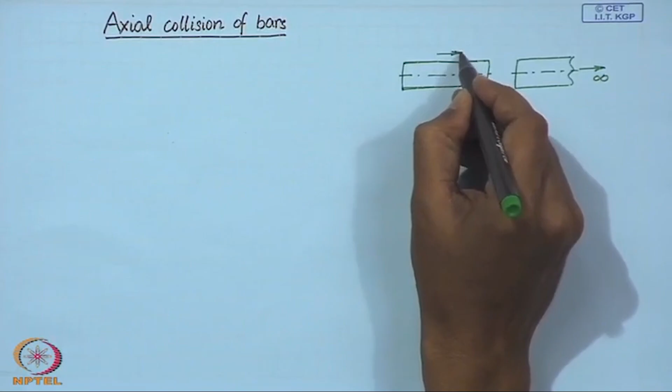Let me draw this figure. So this is a bar, this is a finite bar which is going to go and hit a semi infinite bar. In order to simplify the whole problem, we come to this very basic problem in which two bars are colliding. This one is moving with an initial speed, let us say v, towards this stationary semi infinite bar.

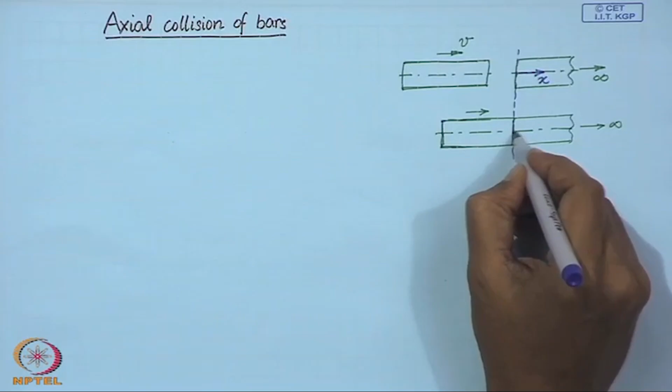What happens after this, that we are going to look at. We are going to fix our coordinate system at this initial location. So we consider this uniform finite bar moving with the velocity v and hitting this stationary semi infinite bar, and we assume that all the motion is in the axial direction.

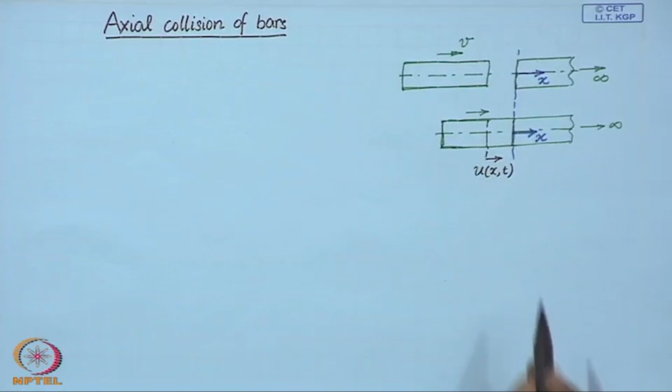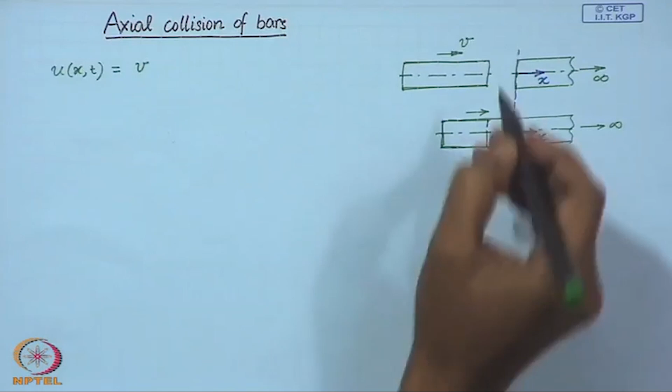So at any location x, the field variable for this finite bar is represented. The axial motion is represented by this field variable u(x,t). Now, the motion of the bar, this finite bar, just before collision — if I call this initial speed as v0.

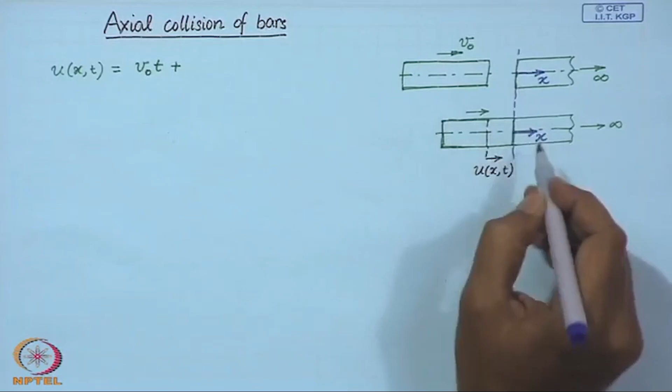Now as soon as this collides, what happens is this face of the finite bar feels this semi infinite bar or obstacle, and this information starts propagating in this bar. So there is a propagating wave in the negative x direction, which carries the information that this face has hit an obstacle. This wave which carries the information we will represent by g(x + ct). So this is the gross motion of the bar, and over and above this there is this wave which is propagating in the negative x direction as a result of the collision.

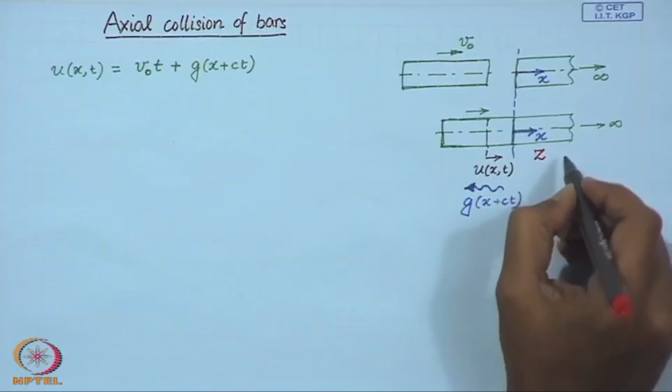Now this wave goes, and let us consider how this wave is being generated. We will consider that this semi infinite bar has an impedance z. This z we will consider for special cases, special values of z, later on.

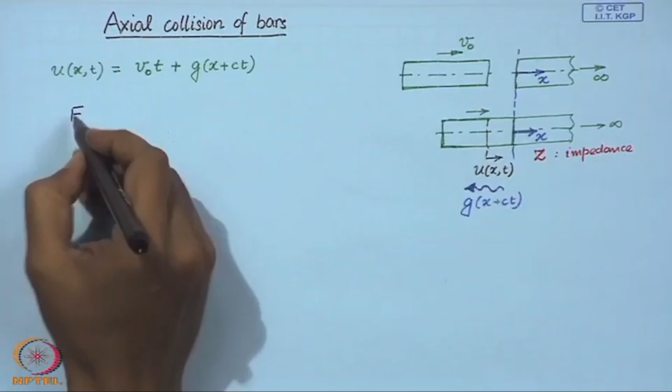So the boundary condition that sets this wave into motion is given by the force condition at this end. If the impedance is z, then z times the velocity of this face of the bar must be the force, and that force is being felt by this finite bar as negative of z times the velocity. So if you substitute this expression of u here, this is what we are going to get, and from here we can solve.

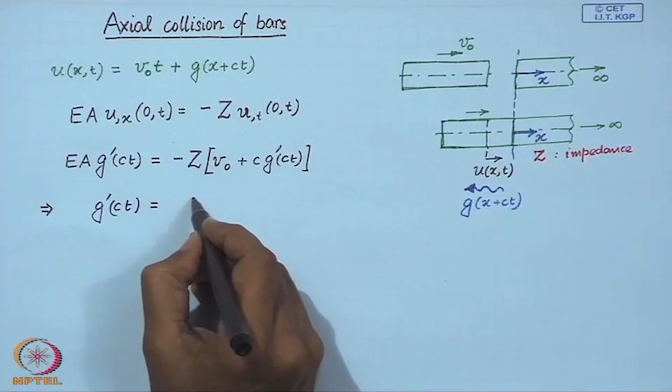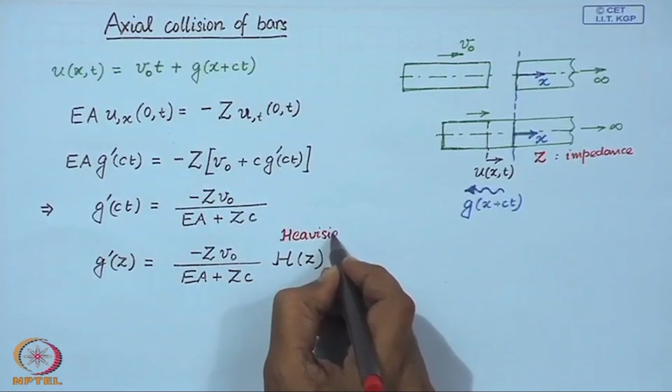So g'(ct) is given by this expression. Now, to take care of the causality, we can write g'(z) where this is the Heaviside step function. This is to take care of the causality of this process. So therefore this is the derivative of the wave that propagates in the negative x direction.

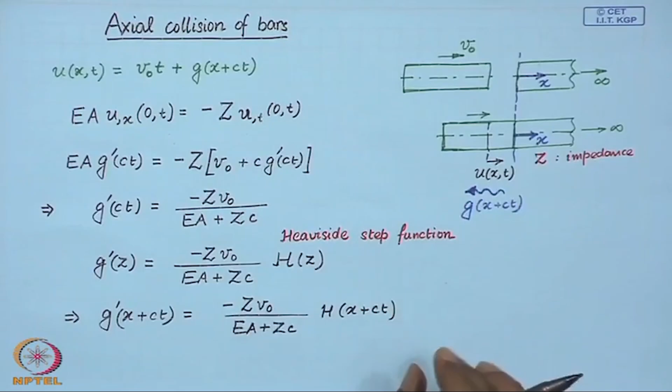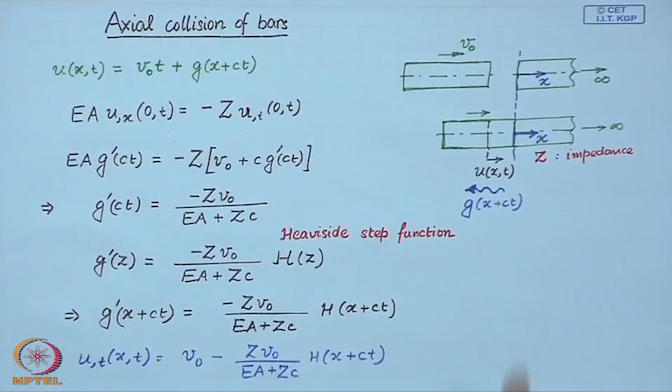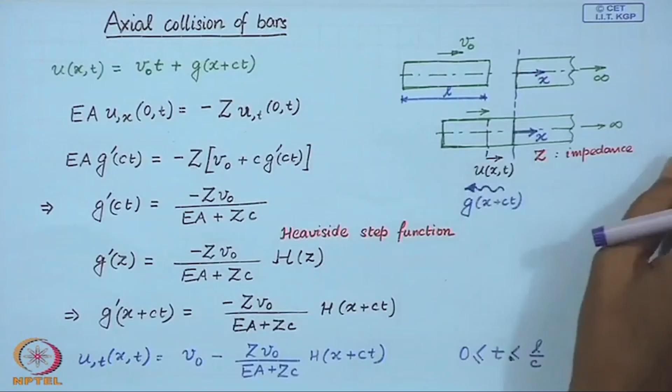So one can write down the velocity of the bar at any point — that is the velocity wave that propagates in the bar in the negative x direction. Now this solution is valid till the time L over C, where L is the length of this bar. So L over C is the time taken by this negative travelling wave to reach this free end of the finite bar.

So let us see what happens at the free end. At the free end, of course, there is a force free condition. So this is our finite bar.

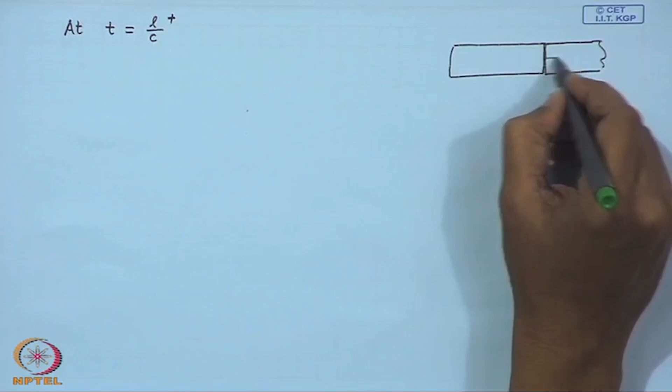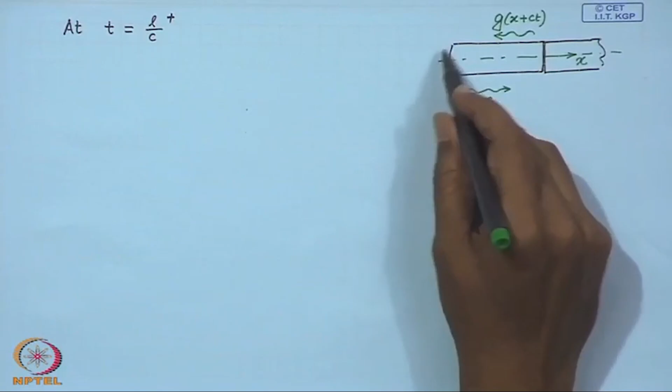There was a wave propagating in the negative x direction, and once this wave reaches the free end of the bar, it is going to reflect back in the bar. So, let us represent this reflected wave from the free end as f of x minus c t.

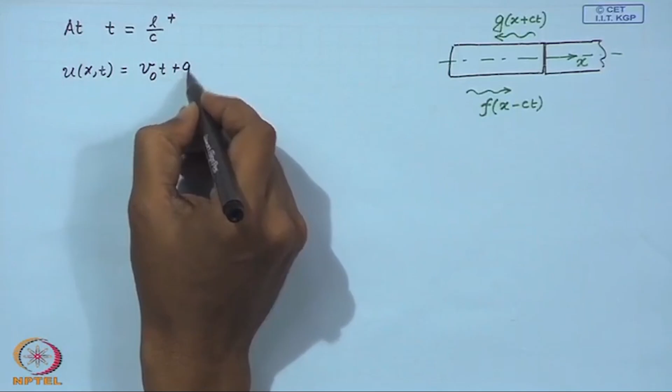So, therefore, we can now represent the wave field in the finite bar by this expression. Now, at the left end of the bar, the boundary condition applies.

Now, you see the coordinate system has been put here. So, this is a force free condition at x equal to minus of L. So, this is our condition, and once we substitute this expression in here,

and simplify, we are going to obtain this expression in terms of g prime and f prime. Now, g prime is already known to us, and if you substitute that expression of g prime that we just now derived, we can write this f prime z.

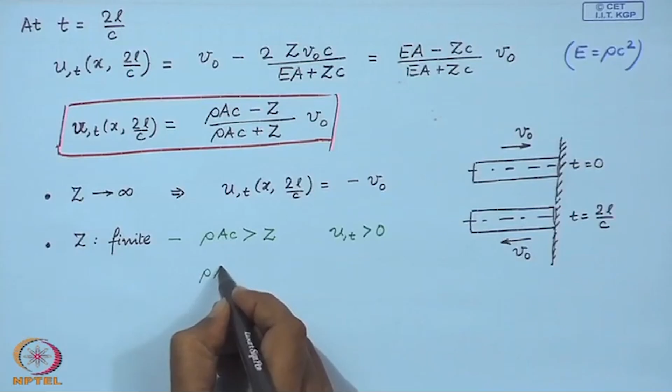Which means after collision the bar is still going to move to the right. In the case where the impedance of the wall and the bar match.

In that case, this bar, the finite bar, comes to a complete halt, complete rest. And the other case.

When the impedance of this bar is less than the impedance of the wall, then this ratio is negative, which tells us that there will be a bounce back of this finite bar.

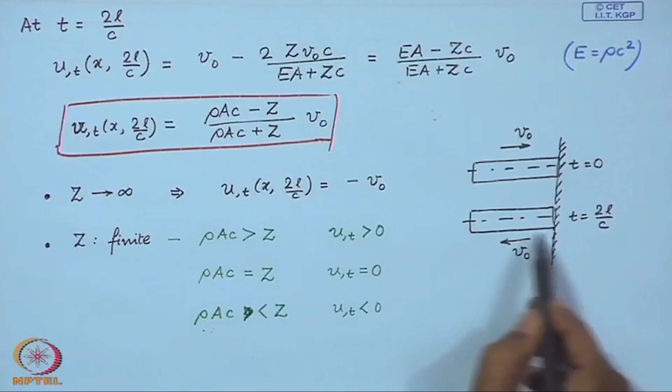So now, most of the time, if the conditions are suitable, if the damping etc. are minimal, then we will observe this phenomena where the wall is much more rigid than the bar itself or the object that is incident. So in that case it is going to rebound back.

In other cases where the impedance is less than the impedance of the wall, which is more likely to happen actually, then it is going to bounce back, but not at the incident velocity, it is going to lose that velocity. So where is it going to lose the energy?

It is going to lose the energy in this wall or the semi-infinite bar as we have considered. So because this impedance is now finite, some part of the energy of this finite bar which is incident here is going to go into this wall or the obstacle. So some part of the energy is going to be radiated into this obstacle.

In this case where there is complete impedance matching, this bar is going to come to a complete rest, and in this case it is going to go into the obstacle. So even after a collision it is going to enter the obstacle, because the impedance is much less compared to the impedance of this bar.

So these are some of the interesting observations that we can have. We also observe that collision, even though it seems instantaneous, it is not, as we can understand that this takes place after a time interval of 2L over c, where c is the speed of axial waves in this finite bar.

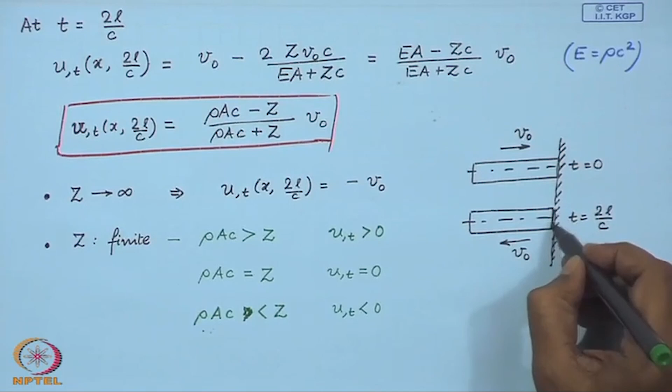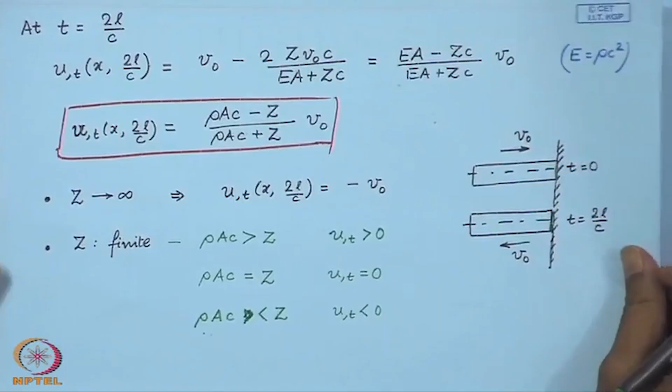Now, so this example can be used to understand the phenomenon of collision of objects. So here again, using the wave solution, we have looked at this transient phenomenon.

Now let us next look at what happens in a traveling string. So vibrations in a traveling string or a translating string.

We have discussed this traveling string problem before, and the traveling string occurs in a loom or in a rolling mill, etc. So we can approximately model a thread line, a traveling thread line, as a traveling string.

Now we are going to look at the wave propagation in a traveling string, how the solution can be represented using these traveling wave solutions, and finally look at scattering of waves in a traveling string.

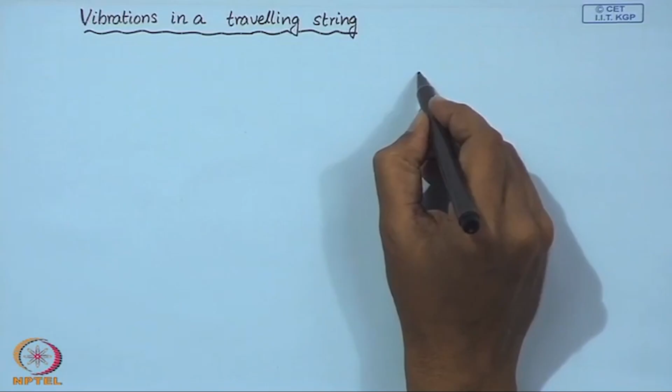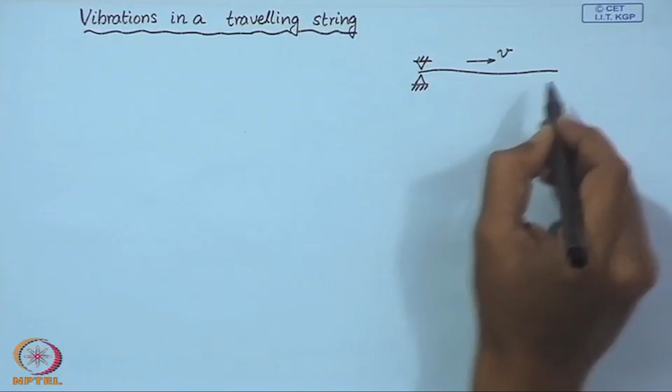So let us consider this string which is traveling at a speed v. So we have derived the equation of motion.

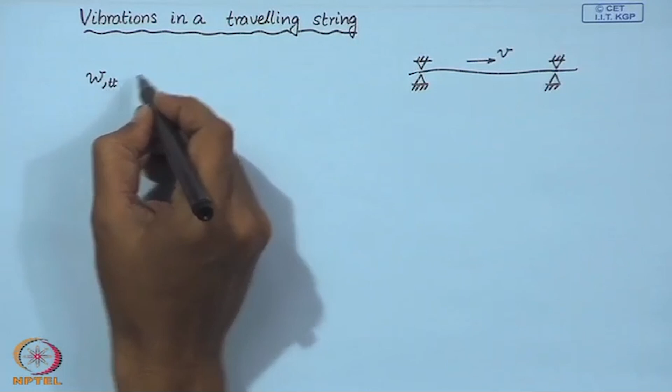For a traveling string. Now here I have shown boundaries, but since we are going to consider an infinite traveling string, we are going to look at wave propagation in traveling strings and understand the solution in terms of these propagating waves.

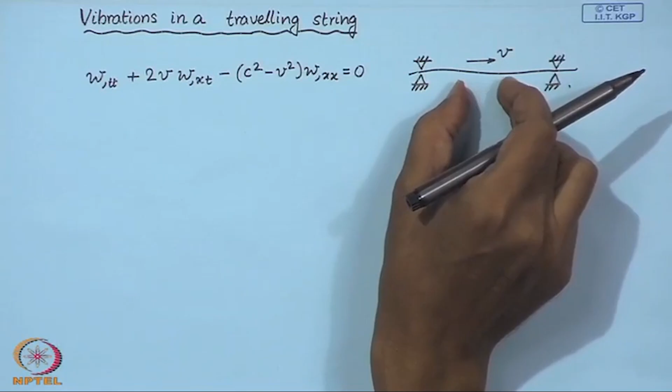So which means that even if I have a disturbance in a finite traveling string, we are going to look at transient solutions. That means, when this disturbance has not reached the boundary. So initially we are going to look at solutions which do not interact with any boundary.

Later on we will see what happens when there is a boundary and there is an interaction. So to begin with, we do not have boundary conditions. So if you consider an infinite traveling string, then we do not have boundary conditions.

Now let us look at this little transformation. Let me define xi, a new coordinate xi, as equal to t, and another coordinate eta as x minus beta times t, where beta is a constant.

Now, let us recast this equation in these coordinates xi, eta. So, here the field variable was w(x, t), our new field variable is w tilde(xi, eta), and we need to determine the equation governing this new field variable.

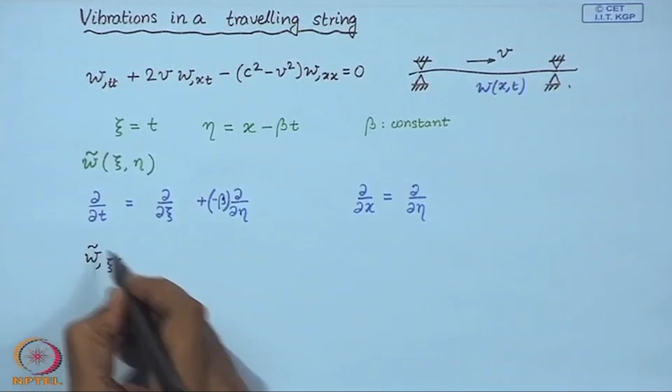Now, when we replace these derivatives here and make simplifications, this is what we obtain. Now, if we make a choice, if beta is taken as v, then the equation reduces to the wave equation, but now in these coordinates xi, eta.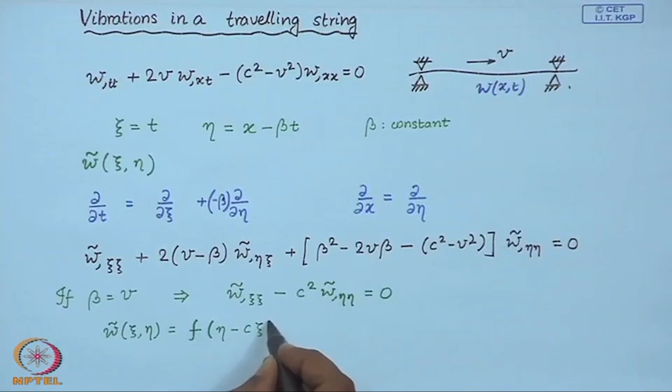Now, we already know that the solution of the wave equation can be written as... and if you go back to the original coordinates, this implies that in the original coordinates, this is the wave propagation solution, or the D'Alembert solution, for the travelling string.

So, now you can see that there is a positive travelling wave whose speed is c plus v. So there is a positive travelling wave with speed c plus v, and there is a negative travelling wave with speed c minus v in the string.

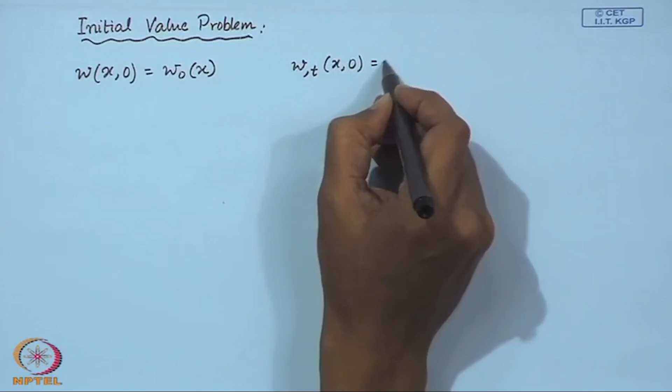Now, let us look at the initial value problem. We have looked at this before, for the static string. Now we can once again look at the solution of the initial value problem for the travelling string. So we normally have a displacement, an initial displacement distribution on the string, and a velocity distribution.

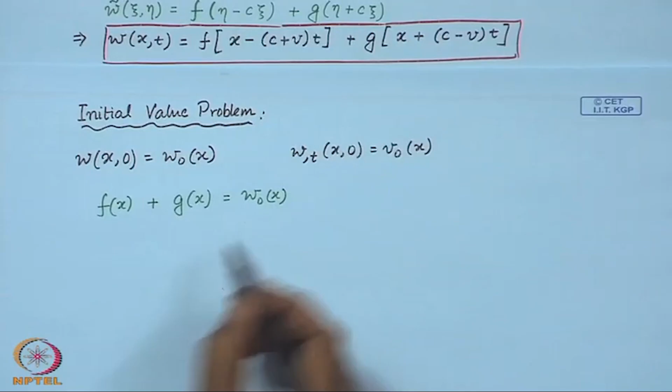Now, using the solution which we have written out here, when I use this solution, and similarly from the velocity condition, we have to solve these two equations for f and g in terms of w naught and v naught. This we have done before: we integrate the second equation with respect to space and then solve for f and g. If you do that and make the simplifications as discussed in one of our previous lectures, the final solution can be easily obtained.

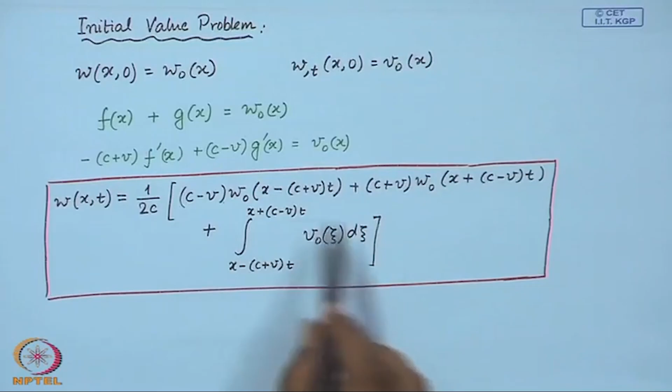So, this is our solution for the initial value problem. When we have an initial displacement, these are the contributions in the solution, and the initial velocity contributes in this way. Suppose we take an example.

Consider a travelling string which is given an impulse at x equal to 0. Now, we have discussed this before: if you give an impulse, it sets a velocity condition on the string, at the point at which this impulse is given. So let us consider the velocity distribution as v naught times delta(x), where delta is the Dirac delta function. If you use this in the solution, here is our solution.

So what we obtain: the initial displacement is 0, so w naught is 0. We have this initial velocity distribution, which is the Dirac delta function. This is obtained as... the integral of the Dirac delta function is the Heaviside step function. Now this has to be calculated at these two limits. So, this is our solution.

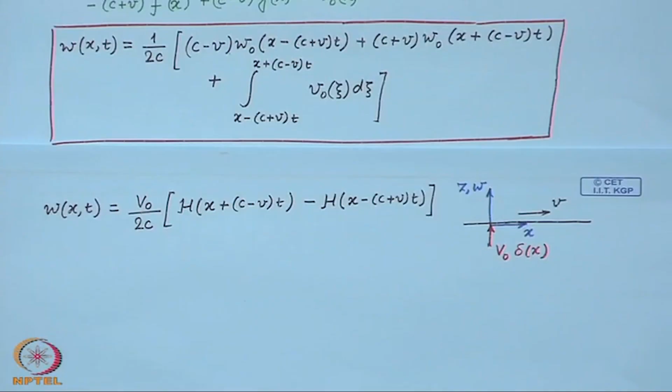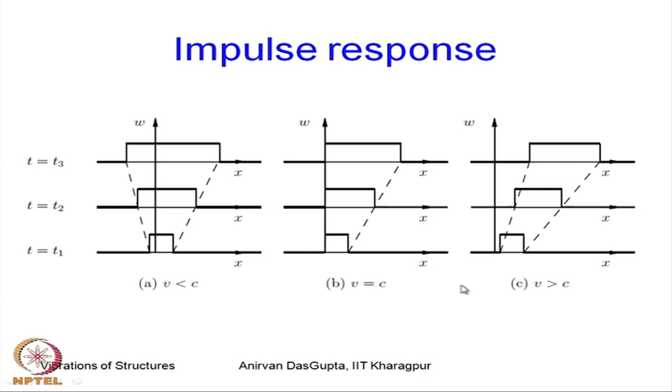Now, if v is greater than c, then the whole disturbance is convected to the positive side. So this front is also convected in the positive x axis direction. So in the case of this infinite string, if you tap the string at a certain point, if you hit it, then you expect to see this front spreading out in the string, depending on the speed of translation compared to the speed of propagation of transverse waves in the string.

So these are the conditions. This is what you will observe in the case of an infinite string, but suppose now this wave or a disturbance in the string goes and interacts with a boundary. So let us study this case of scattering from a boundary in the case of a travelling string.

So this is the string travelling at speed v. Now we consider that there is this incident wave. So this is a semi infinite string. We will consider a semi infinite string, and there is a wave incident from minus infinity.

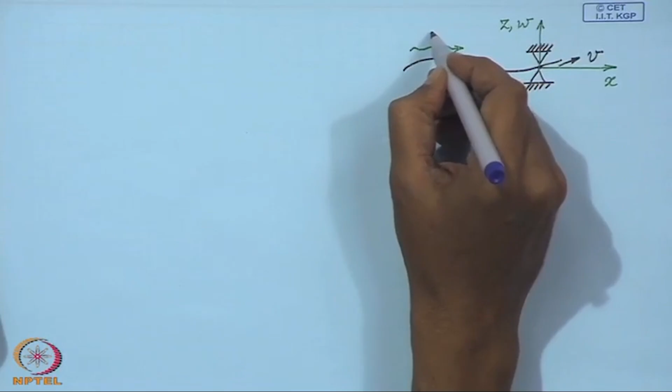Now, as we have discussed just now, the speed of a positive travelling wave is c plus v. On the other hand, the speed of a negative propagating wave is c minus v. So these are the phase speeds in the positive and negative directions. We expect that this phase speed is the ratio of the frequency to the wave number. So if for the incident wave it is c plus v, then in general, let us assume that for the reflected wave, omega prime over k prime is c minus v. Unlike in the case of a static string where they must be equal, now since the speeds in the two directions are different, we have to be careful that these may in general be different.

So, therefore, if the incident wave is written out like this, then this is k x minus omega t. So omega I have replaced as c plus v into k.